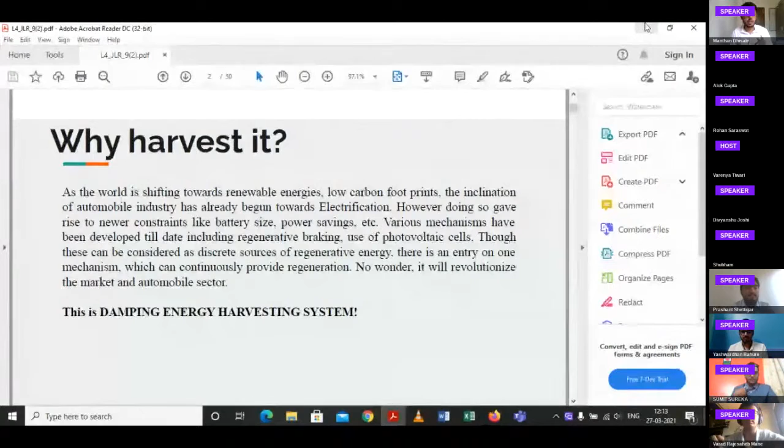Why harvesting? Because the world is moving towards renewable energies, and the automobile industry is more inclined towards electrification, so we need some regenerative mechanisms, and here comes our damping energy harvesting system.

For now, considering the combination constraints of piezoelectric and generator-based systems, which we do not have to use, we have five ingenious concepts from our side. These five mechanisms are working with all proper simulations, in this sequence: capacitive, triboelectric based generator, LVDT, thermoelectric generator, and VIV, vortex induced vibrations.

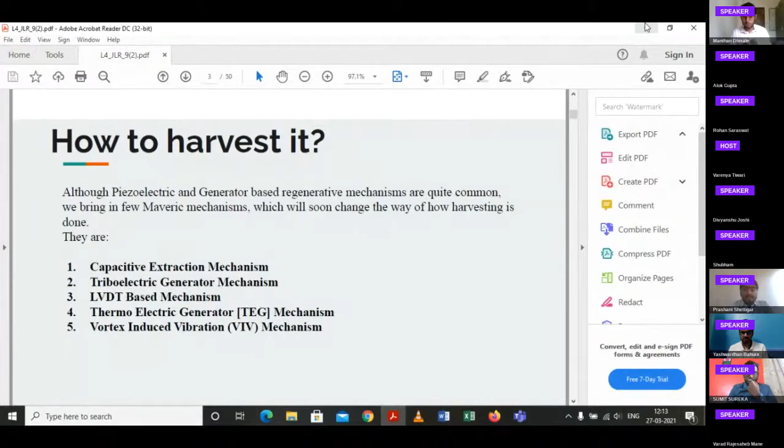Going to the next one. Audible here? Yes, you are audible. Okay.

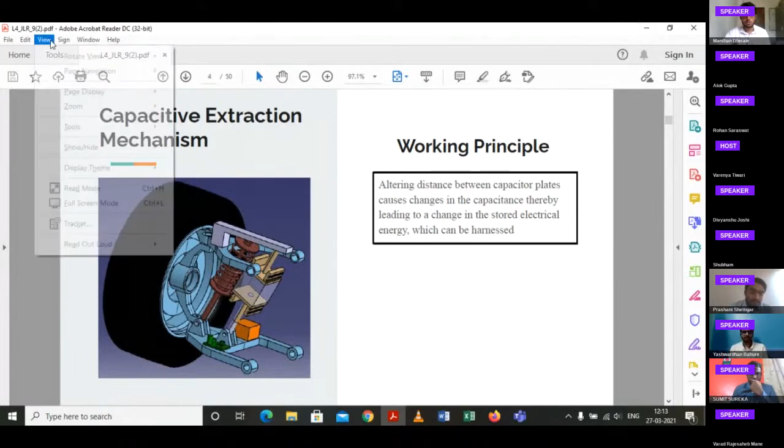The basic fundamental behind this mechanism is that the altering distance between two metal plates is caused due to the uneven nature of the road. Hence the capacitance value alternates, which leads to power generation. The plates are charged initially, and the two surfaces are made of different metals with different work functions to maximize the power output.

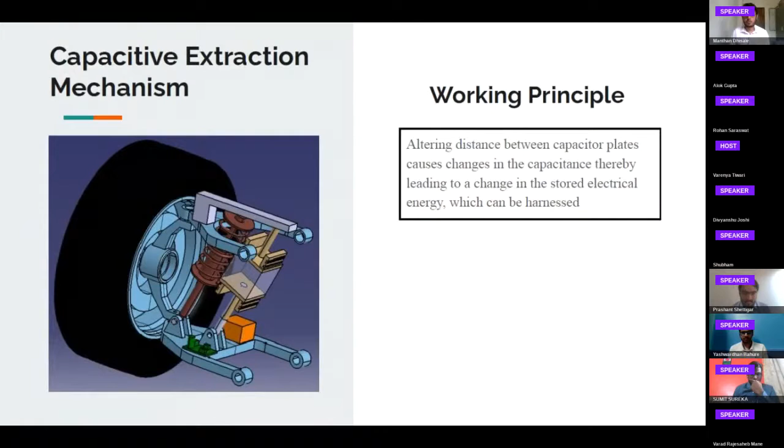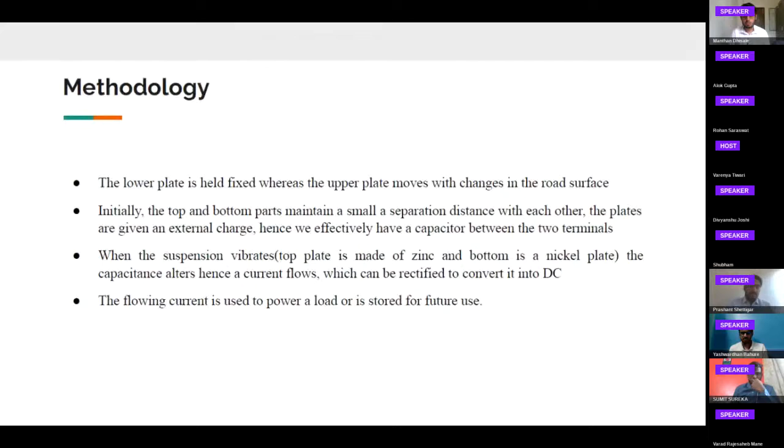One more - the mechanical equations part. So basically we have the standard mechanical equations, we just add another force term. It's quite a simple calculation, and we received an output power of roughly 3 watts.

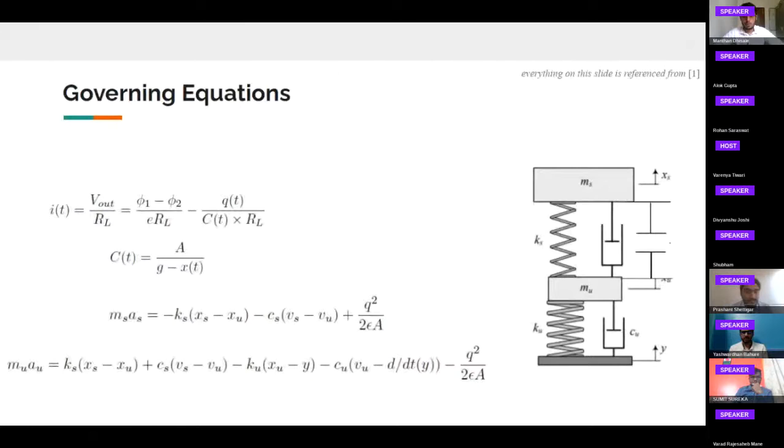Consequently, you could see the geometry. The golden plates which you can see, that's basically the effective capacitance, and we assume that the geometry doesn't change because of the forces involved. Yeah, okay, that was it.

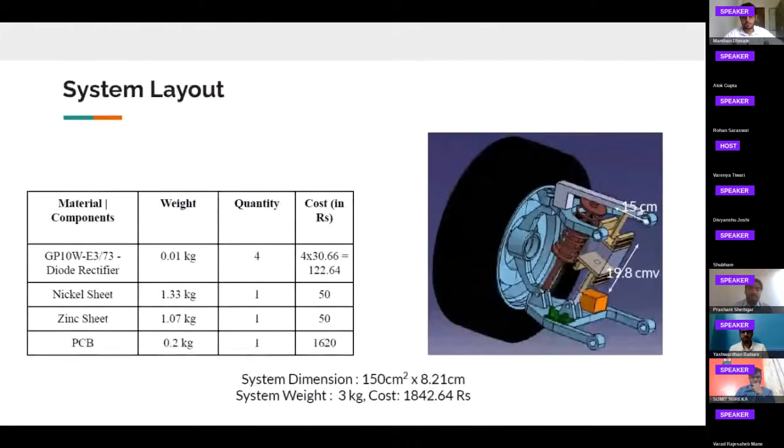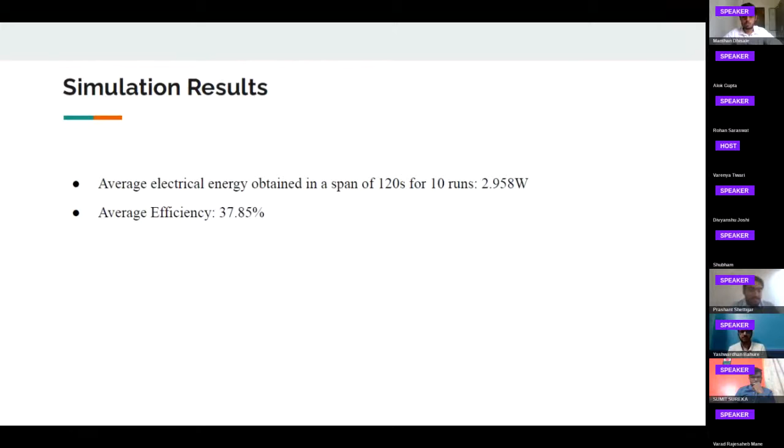Shall we continue with the next method? Coming to the triboelectric generator. The working principle used by a triboelectric energy harvesting system is based on the coupling effect between contact charging and electrostatic induction.

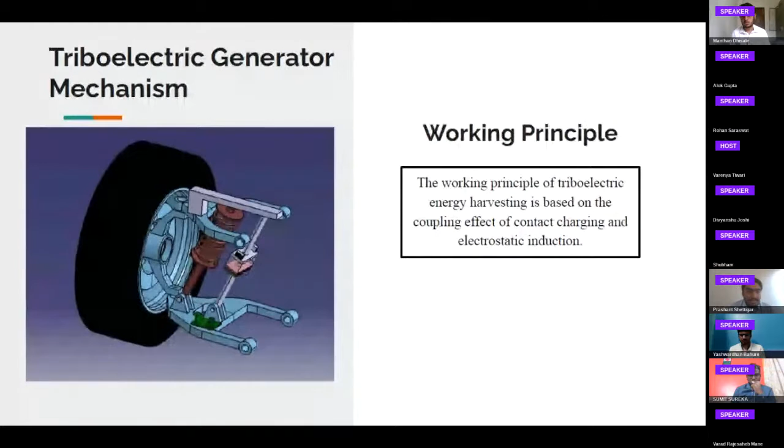These are the literatures we reviewed, and based on this we came up with this method. This triboelectric energy harvesting can be done in 4 methods, out of which we will focus on the first one, which is vertical contact separation mode. How this exactly works is, initially, can you move to the next slide?

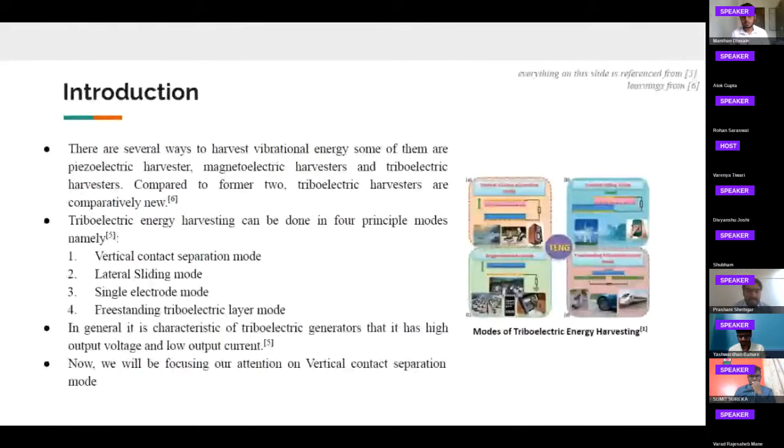Initially there's some space between the aluminum and PDMS layers, so there's no charge at this point. There's some vibration in the system, so these two layers come in contact, and due to the triboelectric effect there's some charge. Based on vibration, when these plates move up and down, there's some current generated, and based on the current, the power output energy is harvested.

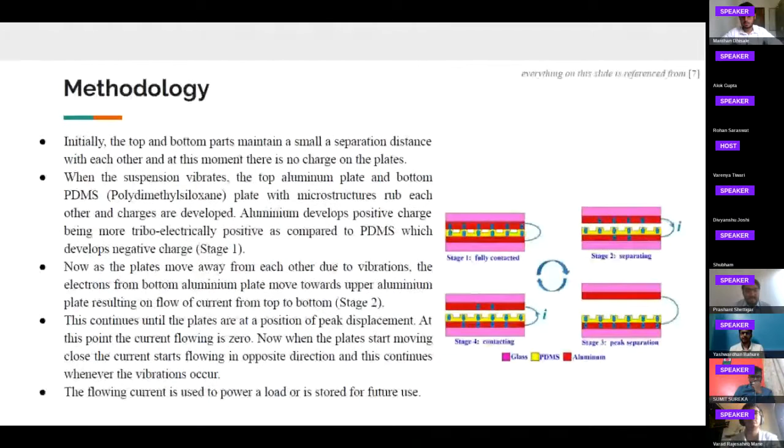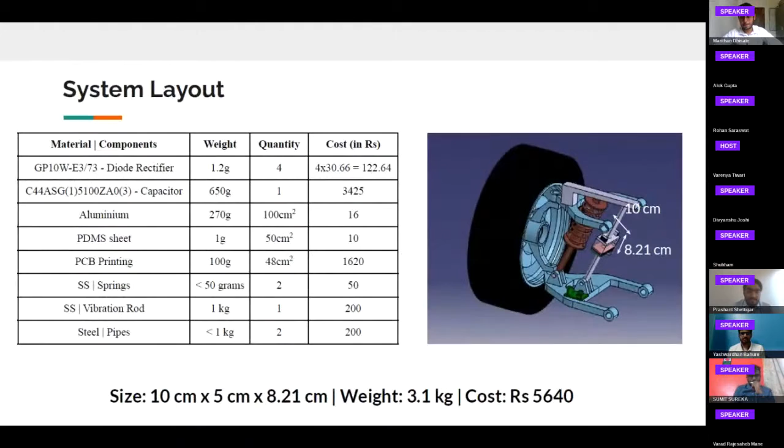This current can be used to power a load, or the energy generated is stored for future use. So this is our system layout - its size is around 10 cm by 5 cm by 8 cm, its weight is approximately 3.1 kg, and the cost is 5,640.

Coming to the governing equation, this is the potential difference between the plates. Here we have assumed sigma, that is the surface charge density induced, to be around 1 microcoulomb.

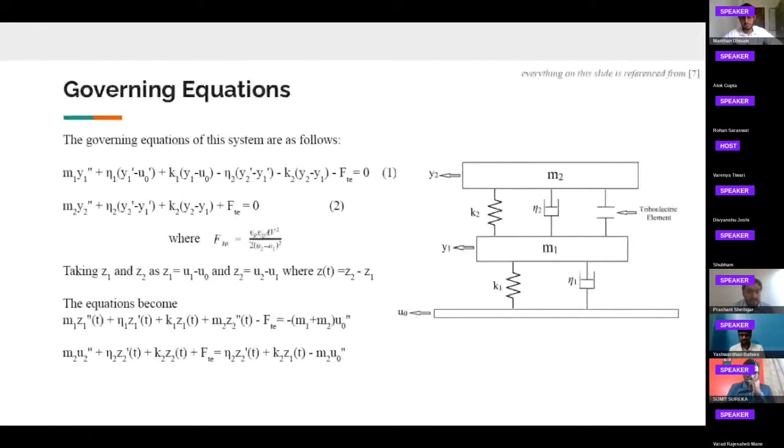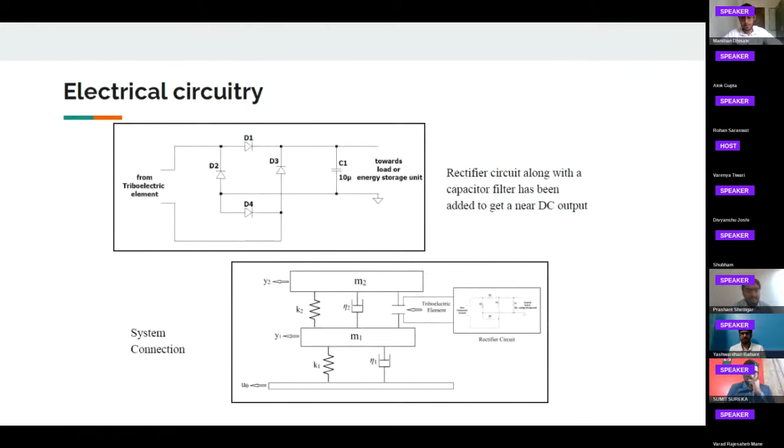These are the force equations for the quarter car model, and these equations have been used to make our model on Simulink. The output voltage that we get is not a unipolar output, and the amplitude is also not constant, so we have used a rectifier circuit with a capacitor to obtain a near DC output.

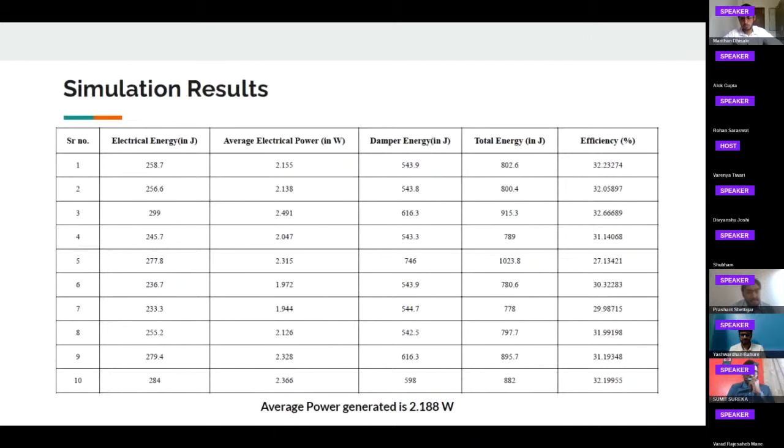Coming to the simulation results, these are the values we got in 10 runs, and the average power generated is around 2.18 watts with 30% efficiency. That's all about the triboelectric effect. Moving to the next one, over to Yash.

Moving on to the LVDT based mechanism, linear variable differential transformer. It works on the principle of mutual inductance to measure linear movement of the damper. Moving on to the next slide.

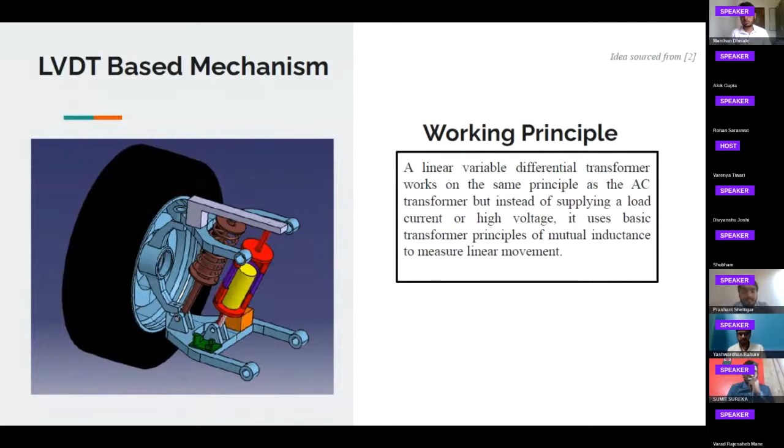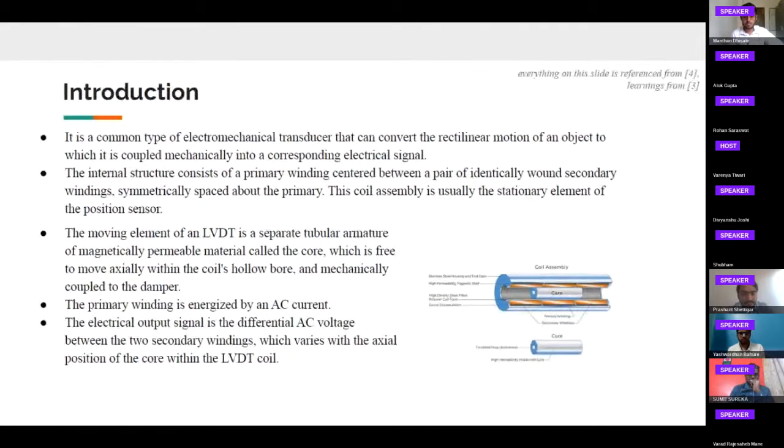The internal structure consists of primary and secondary coils along with a core connected to the sprung and unsprung parts of the damper. Primary winding is energized by low voltage AC current. We surveyed the following papers and came to the methodology that initially the core is at null position with equal flux coupled to both secondary windings. When the suspension vibrates, the flux linked to both coils changes and accordingly a differential voltage is generated.

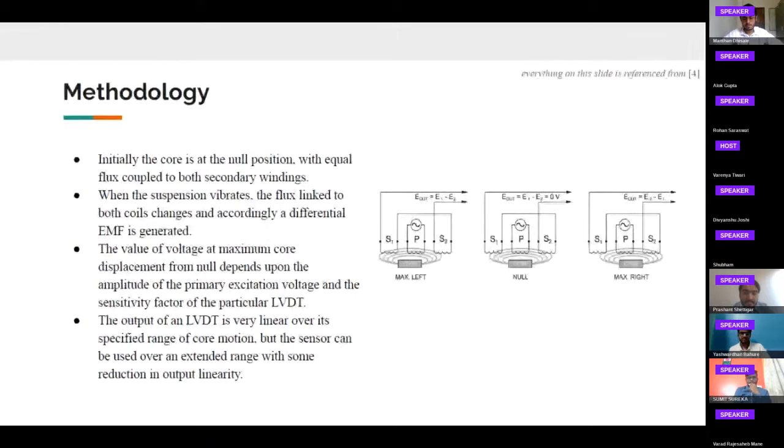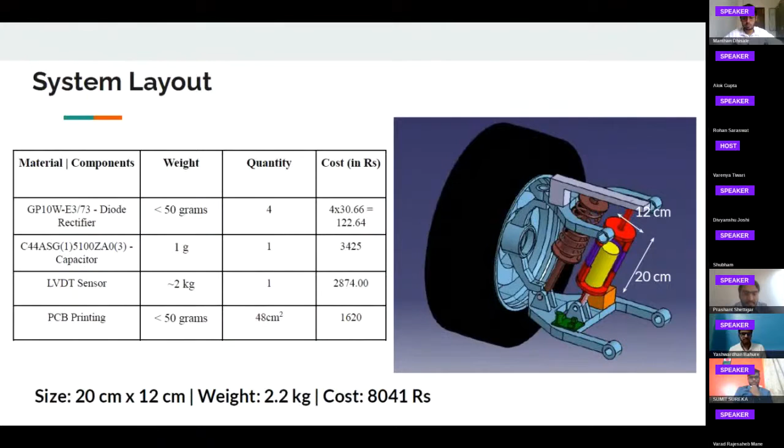The output of LVDT is linear over its specified range of core motion, but it can also be used over an extended range with some loss in linearity. The system layout is as follows: it would cost approximately 8,000 rupees to construct this setup, with a weight of 2.2 kgs, and the size is around 20 cm by 12 cm.

Now to the governing equations, the relation is linear, so the output voltage can be expressed as V out equal to M times D, where D is the displacement of the core and M is the sensitivity of the sensor. It depends on the turns ratio of the transformer, the excitation voltage applied to the primary coil, and the maximum displacement of the core in its linear region.

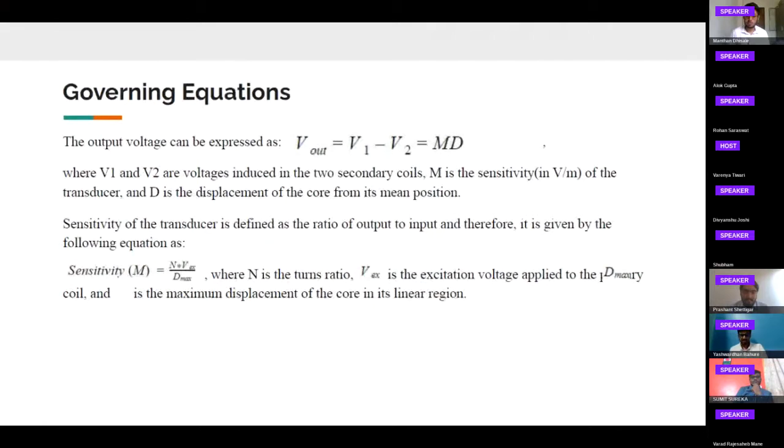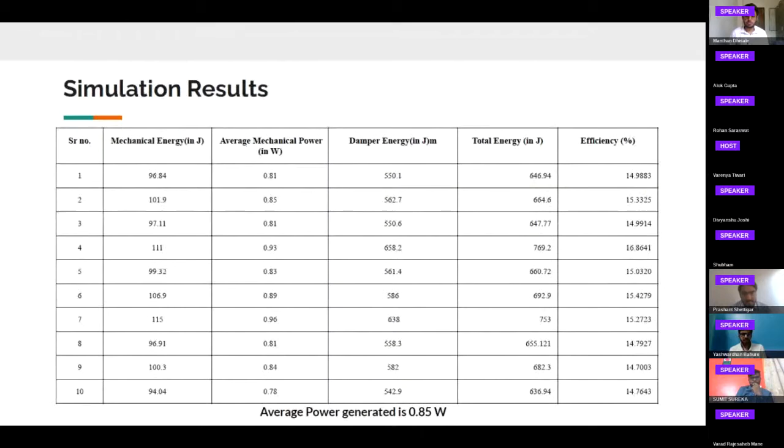Coming to the thermoelectric generator, the idea behind this is to convert the heat energy caused due to the damping effect on the piston of the damper into electricity.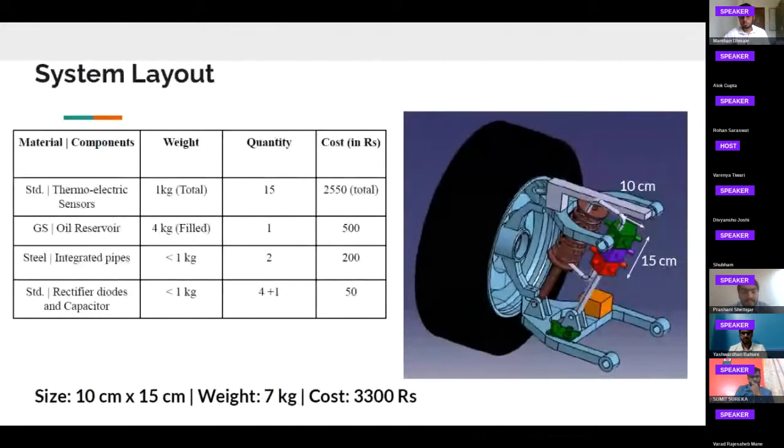And as you can see in this picture how we are going to set up this tank in parallel to the damper and the spring. And this is the simulation we have done, and the result we have got for one module is 0.12 joule and the average power is 0.001 watt, and we are thinking of fitting 15 such modules in our system so that we can get a total power of 0.015 watt.

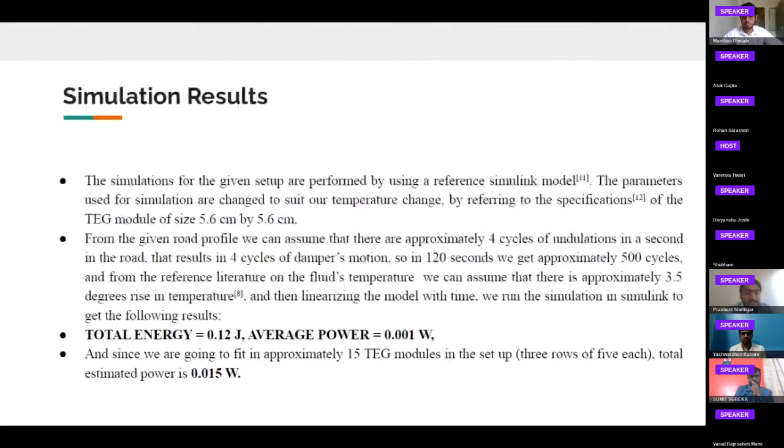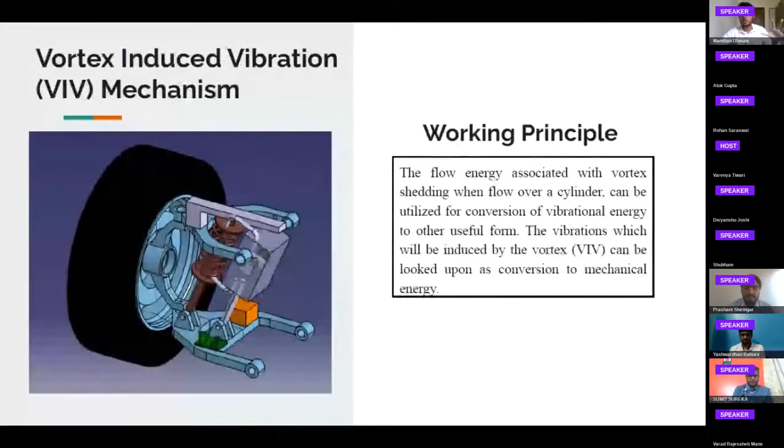Thanks, Sumit. So moving towards the next mechanism, the motivation behind this is borrowed from ocean engineering, wherein the actual phenomenon of flow, the flow of fluid over a cylinder, causes vortex shedding. So this vortex shedding actually has energy associated with it. So this energy we are going to harness for our mechanism. So we have miniaturized that ocean mechanism into this particular system. Based on this survey that we conducted, the methodology is as follows.

There is a separate parallel vibration box, as we call it, in which there is a vibration rod suspended by some springs. When there is a flow of fluid because of the jerky motion of the rod, the fluid will start flowing over the vibration rod, which is cylindrical in nature. This will give rise to some vortex shedding. The vortexes will be formed. So energy from these vortexes will be extracted by some mechanical means. Primarily we are thinking of having load cells associated with each of the spring ends so that we can harvest the electrical energy further.

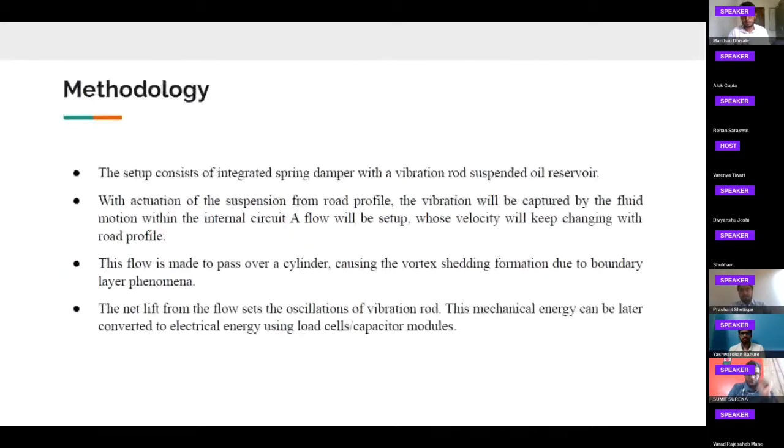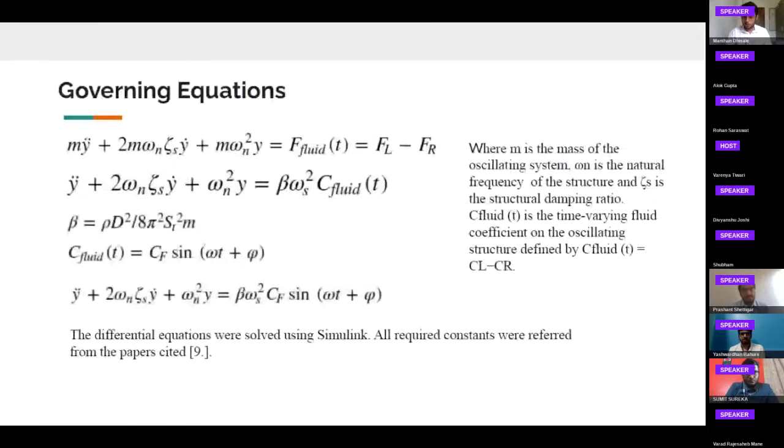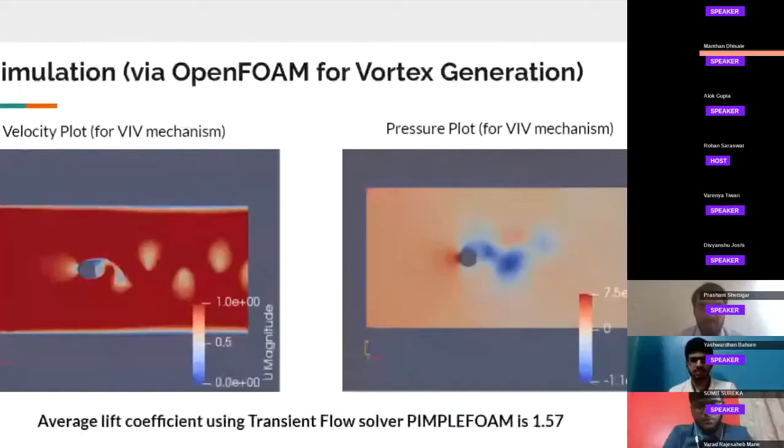Manthan, can you share the slides? Can you share the slides? Oh, sorry. Are they not visible? No. Guys, sorry, time up. Yeah, thanks. So this was from my side. We have summarized this. Over to you. Questions from... Just start the. Yeah. Can you share your screen? Okay. Sorry, there's some issue with my internet connection. Sumit, can you switch off your video and take the lead? Okay. Yeah, here it is now. Is it visible? Yeah. So questions open to you guys. Sirs, you can ask the questions.

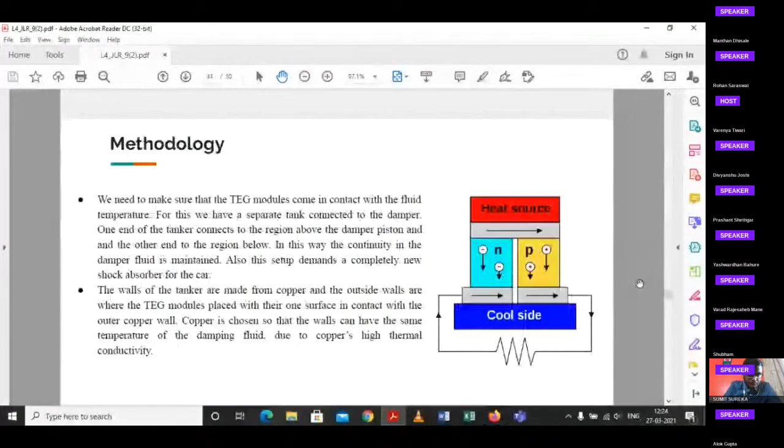Sorry, you're not audible properly. Hello. Is my voice clear now? Yeah. Now it's slightly clearer.